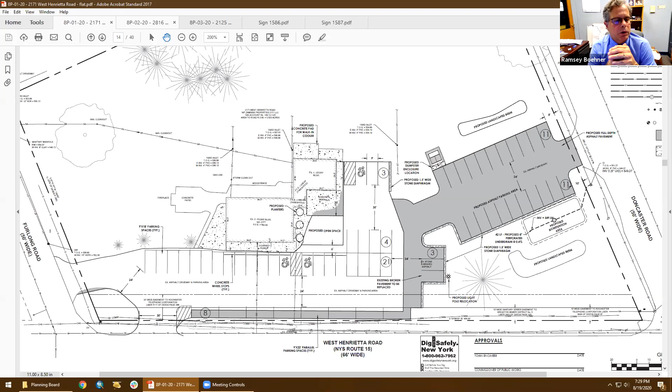The town is going to be looking for a sidewalk easement along the West Henrietta Road frontage. At this time, the commissioner doesn't want sidewalks constructed there, since safety improvements are hopefully going to be made along West Henrietta Road as part of a New York State DOT traffic study. He doesn't want sidewalks put in and then ripped out as part of that project, but would still want the necessary sidewalk easement along the frontage. It appears the entire neighborhood adjacent to it has no sidewalks. Yes, that's correct.

We're not proposing a whole lot for additional lighting. The main lighting on the site will come from the building itself, with wall packs to light up the entrances. John's already got a couple lights in the front parking lot along Route 15 that shine toward the building. One directly to the east of the building will probably stay. Another one is in the DOT right of way and needs to be moved, proposed off to the north near the parking jut out, a good spot to light that area. John's able to run electric from the pole in front of the building to those spots. That's all we're proposing for new lighting.

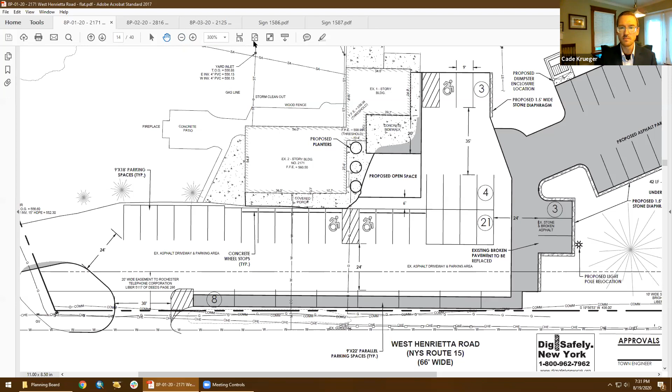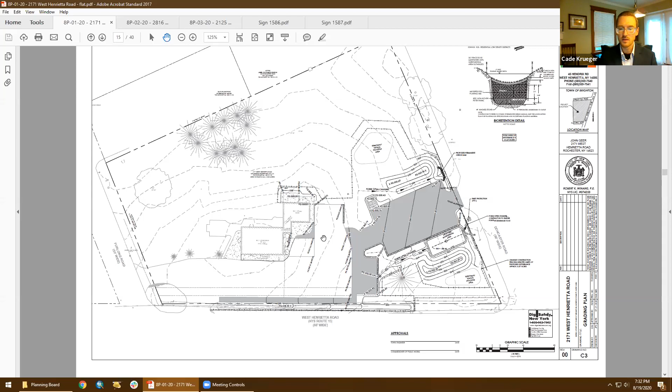Can you tell us a little bit about your stormwater management design? Drainage on the site generally flows in all directions away from the building. Most, if not all of it, eventually makes its way to Route 15 and then loops around to Doncaster. Some of it along 15 currently sits in low areas, and once it fills up, it keeps going around the corner to two drainage inlets in the grass along Doncaster. We're going to keep that drainage pattern the way it is as best we can. We do have a bioretention area with plantings proposed. After talking with town staff, we have a little work to do to get on the same page about how to handle the stormwater, but it's nothing we haven't done before. The increased runoff from the new impervious area, according to our analysis, is very small, but whatever the final number we agree upon, we're going to be treating it in that bio area that's going to be planted.

This is for Ramsey, if you can speak to stormwater - they're not obligated to either treat for water quality or provide any type of retention for the existing paved area, they're just accommodating the new pavement on the redevelopment parcel, Bill.

I'm just going through the town engineer's notes. They must meet our stormwater management code regarding increase in peak flow rates, velocity, and duration of stormwater concentration, and address how that's mitigated. Technical calculations demonstrating compliance with our code need to be provided. We also need percolation testing.

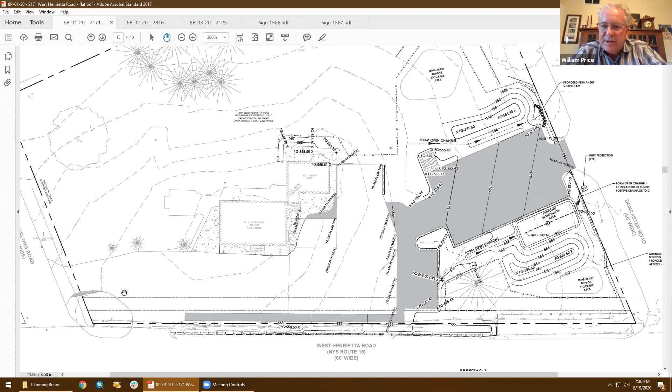I think what's proposed is fine. I'm just curious, it appeared there's a large dead tree toward the back of the parcel. There is one ash right along Doncaster that's deader than a doornail, and almost directly behind the building, north of the existing evergreens, are two fairly large poplars. They're multi-stem, and at least one stem on each is completely dead. They're probably 50 to 60 feet or more, and we're proposing to take those out—they're very messy and pose a danger in terms of breakage and dropping limbs.

I also noticed the area between the shoulder of the road and the pavement—not the area where the buckets and that curb cut is closed off—needs to just be neatened up. Same with the area closer to the southern curb cut. There seems to be a lot of volunteer growth that might be a sight distance issue if that curb cut stays open.

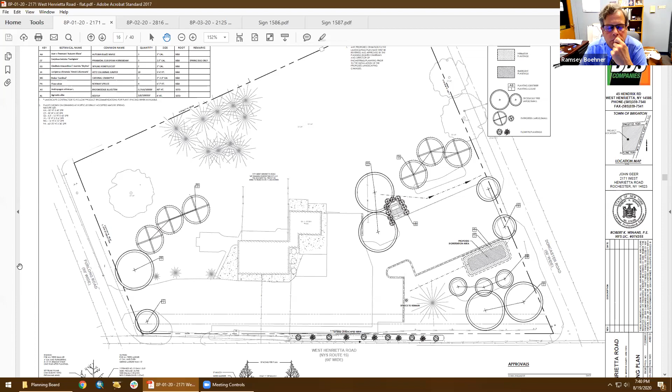Where is it located now—the dumpster? Do you see the landscape plan, Ramsey? It's on the additional parking to the north, on the western edge, with small evergreens around it. No, where is it currently located? Oh, it's pretty close to the building, I think—isn't that right, John? Currently we just have a small, like 10-yard dumpster for construction debris. Isn't there an existing place where the dumpster's been located with the enclosure?

It might be good to know where that was and why we're moving it. So according to some old pictures that I have, it was in that vicinity, and it's in real poor condition. It was always exposed, the surrounding fence around it was pretty weak, and it was always an eyesore.

The other thing to consider is if the town does allow the ice cream pickup there, with prevailing westerly winds. The other motivation was to move the dumpster away from any area where people might be eating, just because in the summertime you can't totally avoid odors. So the dumpster was moved away.

I got you, you're saying you moved it to the northern part. It wasn't there, but it used to be over by the building, over by where the ice cream window is going to go. And you're telling us you want to move it because you don't want it near the ice cream window. Correct.

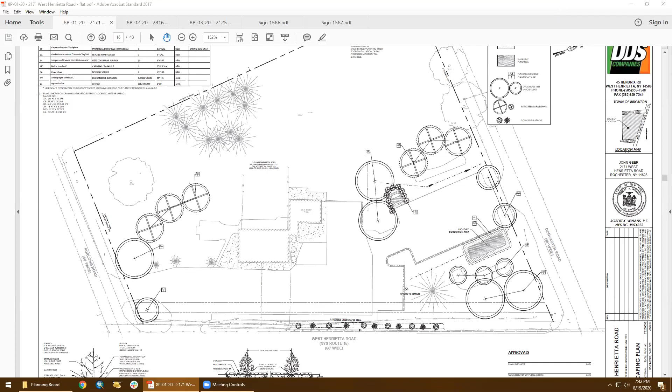Okay, let's ask if some board members have any questions. I do. I'm wondering why the separation of the northern parking addition from the existing. You could gain at least 3, maybe 4 spots if you didn't keep the drive between the two parking areas.

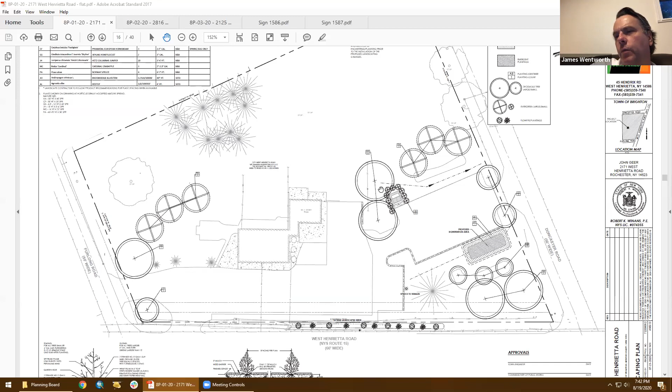Yeah James, I think the part you're talking about is like the little bottleneck there. Correct. Yeah, so I guess the main reason for that is we're trying to utilize that existing drive as best as possible.

I think you're right, I think we have some room to shift that to the south if we need to, especially to get it away from that property line on Doncaster a little more. We just need to make sure that we can make those turning movements coming around the corner there. But I think you're right, there's some room to play with.

The other thing to be considered is how that area is going to be graded to drain it properly. Right. Fair enough. Thank you, James.

Anyone else? Laura, John? Yeah, I have a question. So I realize they're applying for a variance not to put in fire protection sprinklers, but I just want to know, is the water service to the building adequate if sprinklers end up being required for the building?

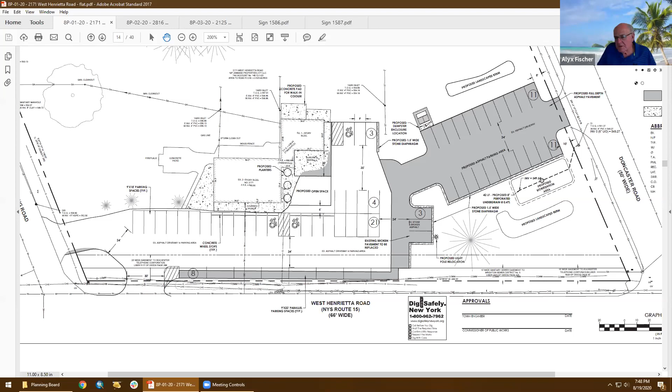There is a threshold that kicks in the state code. For the town code, if you put in 50%, make improvements to the building, 50% of the building's assessed value, the town code requires you to put in sprinklers. So those are the two thresholds. What the exact seating count is for the state, I don't know, Laura. I believe it to be 100. Thank you.

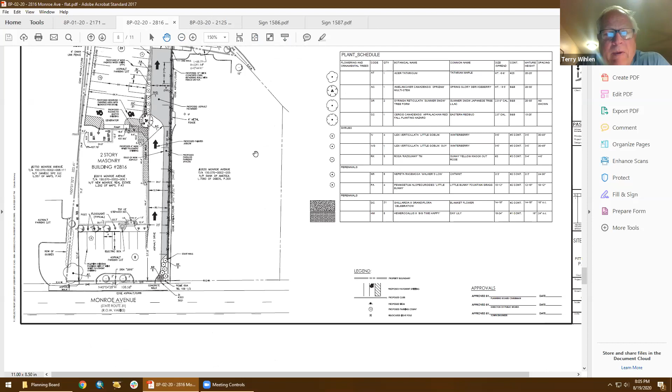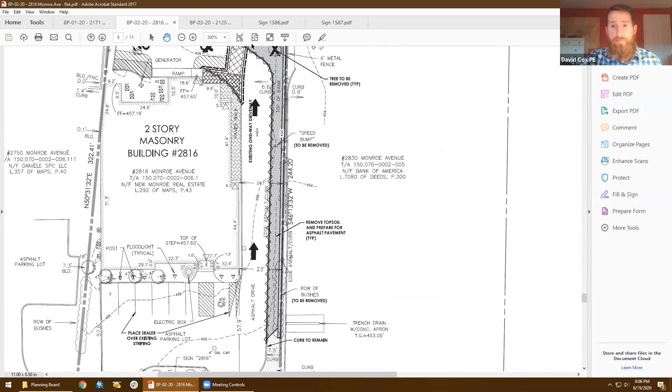Right now it's a little more than 12.5, closer to 14 or 15 currently. We are expanding it to be able to put the parking in there. It will be 12.5 after we finish all the improvements, with 8-foot wide parking spaces. Is that correct, Dave? Yes.

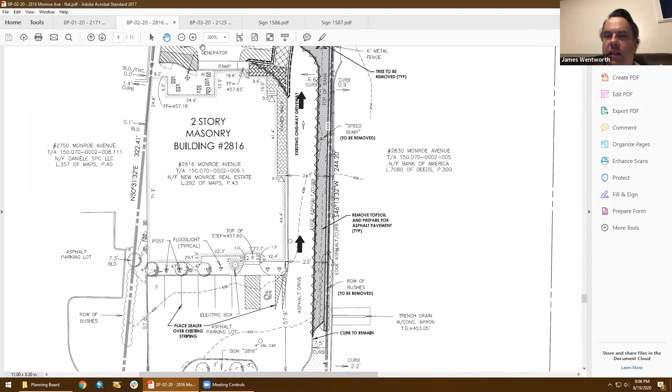Are we talking the drive on the east side? Yes, there will be parallel parking on the east side. Forgive me, I missed that. Gotcha, and that starts necessitating the need for the retaining wall.

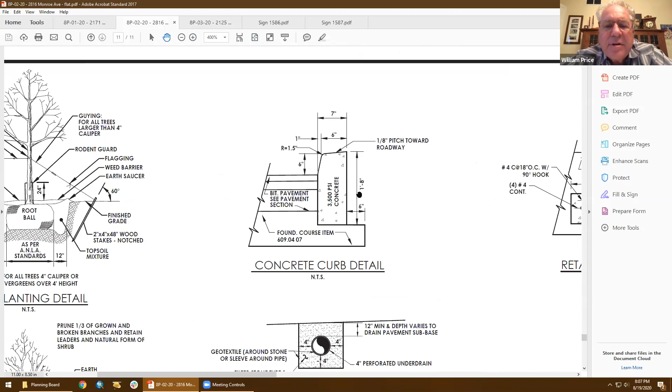Is there a section of the wall? On the detail sheet there is. That kind of top middle - you're cantilevering it back, little bit to the right. That's the regular curb. Okay, I see.

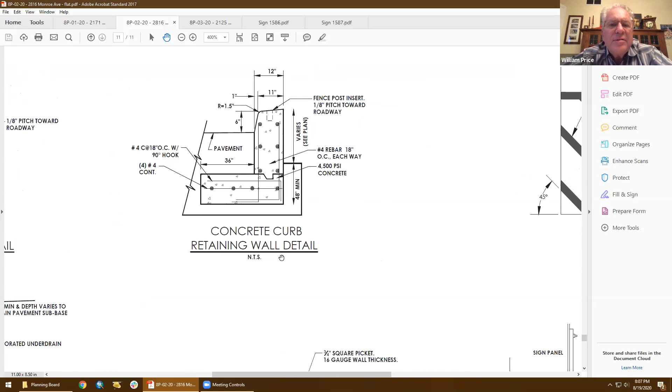And you're just putting a fence on - is that like a 42-inch barrier, or is it a railing? It's going to be more like a 42-inch fence. Okay, I see. Yeah, and that's it. Okay.

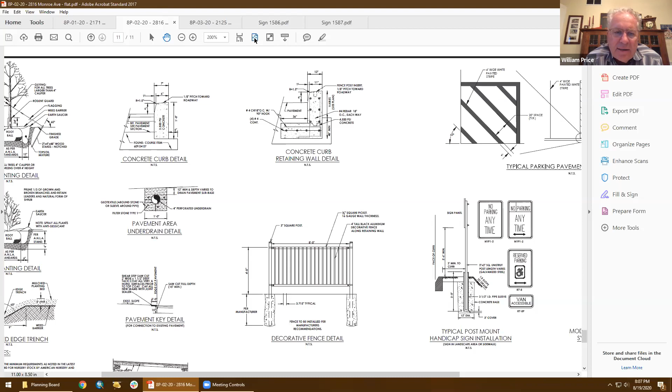One of the things I know, because we go there quite a bit, is the staff take animals out for a walk on the lawn area and under those 3 trees that will be lost. Where are you going to take the animals to walk now? First of all, I wish I was a doctor, but I'm not - I take care of all the facilities. My son is the doctor and hospital director for Pittsford Animal Hospital.

Todd's your son? Yes, he's our vet. Anyway, when I talked to Dave, the fence line that we have over on the west side, we would take and move that right over to the property line, and that would be a green area to walk them down in front of the cars. I noticed that fence line is the chain link part, and I think what's part of Mama San's property.

Is probably that wood shed that's out back, or maybe it's part of a fence. I couldn't tell, but if you kind of cleaned that area out - there's some dead trees and brush in there - and reset a new fence, you probably could get some lawn between the pavement and the property line. Yes, but that needs a little cleaning up. That fence is pretty old and bent up and everything else, we want to get rid of it.

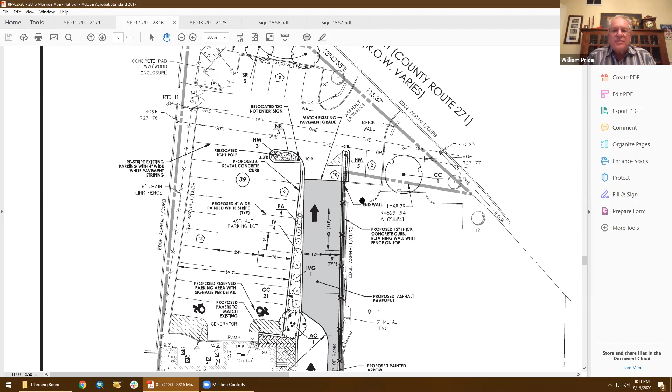Yeah, there's actually 6 there now. The two is - there's part of 6 that exists there.

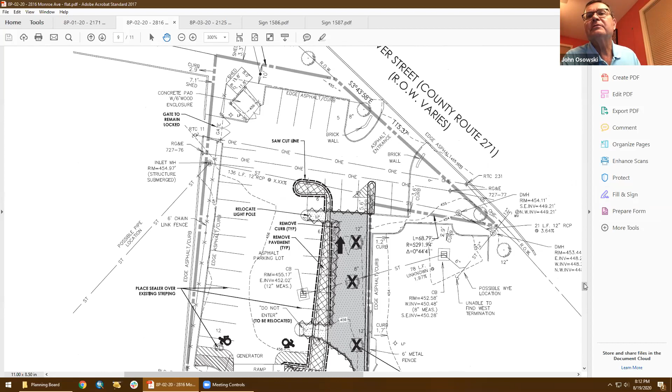Other questions from the board? Yeah, this is John, I have a question - how do you handle snow removal and snow storage on this site? At a lot of our places, we haul it off site. We have a contractor that'll come in with a dump truck if it's that amount, and load it up and take it off site.

Dave, have you checked to make sure you have all the compliant accessible parking spots by numbers? Yes.

Laura, Jason, any questions? No, I'm all set. Thank you.

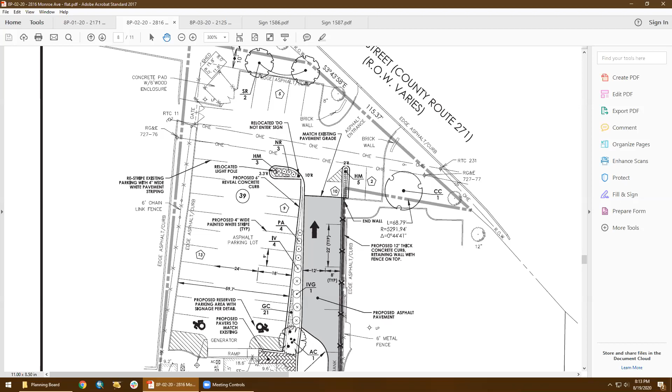Terry and David, thank you. Thank you very much, again thank you very much. We'll be discussing this a little bit later. Oh David, I'm sorry, remind me, you said September 2nd for the variances. Right, okay, all right, thank you.

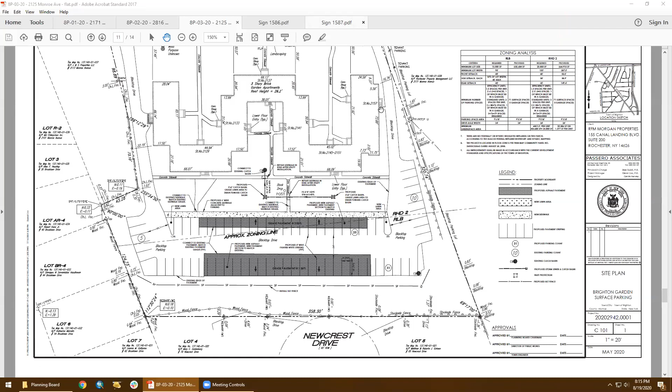Am I able to share my screen at all? There's some pictures I could show, don't know if that's possible. Jeff, can you do that? I'm not sure, we can try. Does it give you an option now, David? Yeah. All right, can everyone see that picture?

Yeah, so here's just people kind of leaving their stuff there. Here's another one. So it's just not what the garage should be used for. Morgan is there. Each unit has storage inside the building, so they would much rather have people store their things in the enclosed storage units inside the building and not just pile things up in the garage structure. So they would like to remove the garage structure that's in really rough shape and just put in surface parking. That's what they're going for there.

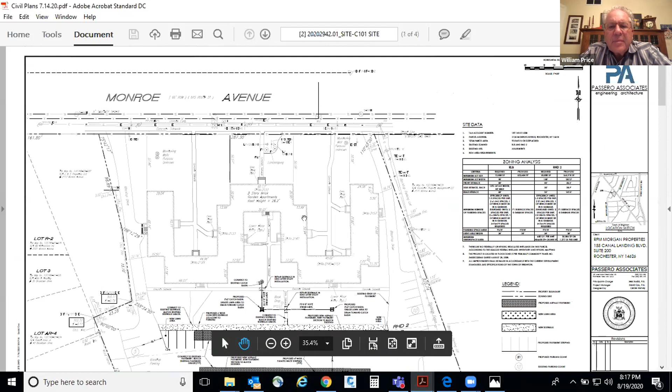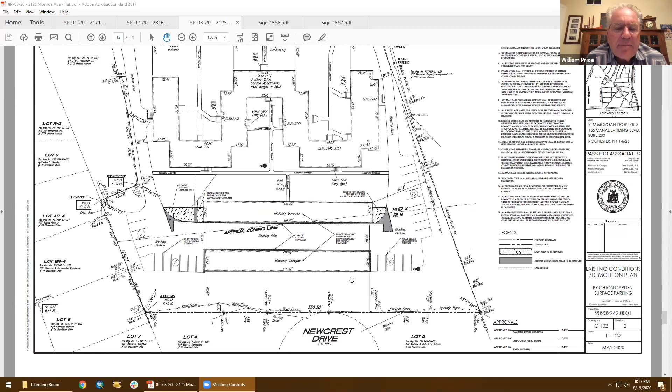Okay, could we go back to the site plan? Jeff, please. So the one that you were just showing us pictures of is along that south side. And north side, both of them. There were pictures from both sides, they're both the same structurally. Okay, and how much distance is there from the back of the garage to the property line? I'm afraid I can't read that. 42 feet, I believe, 41.9. Okay, all right.

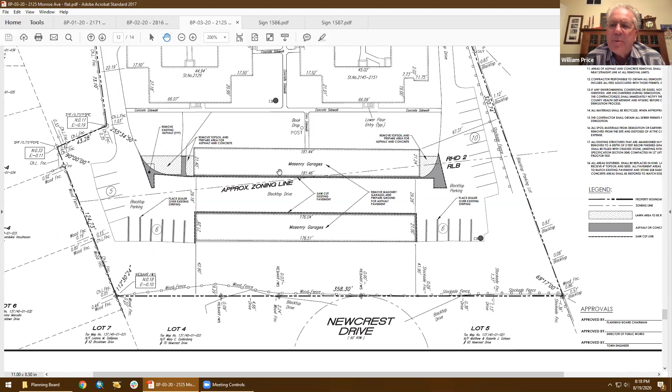And when you talk about replacing with asphalt, is the slab currently concrete and you're going to tear that up? Yeah, they would tear that up and just make it all asphalt. Okay, how about any new lighting, is there any new lighting proposed? So there wasn't going to be any new lighting proposed.

And what do you have in the way of drainage back there, do you have drainage structures? So on the south side, the current parking structure just has a sloped roof that dumps water off the back, and then it goes into the grass area where it infiltrates, so we would just maintain that existing drainage pattern. On the north side, we're putting in two new catch basins that the parking will drain to, that green space area drains to the catch basins, and we'll tie that into the existing storm sewer network.

I see, okay, oh I see where your two structures are. Okay, all right, so the concrete sidewalk and the asphalt will be flush? Right, correct. Okay, I see, okay.

Very good, all right. Does anyone, Ramsey, do you have questions? Yeah, Dave, how do you see the headlights from the cars that are parking there at night being screened, especially during the winter? I know there's some vegetation back there, but I'm a little worried about all of a sudden now we have a row of parking behind those houses on Newcrest. And how do you propose screening those headlights?

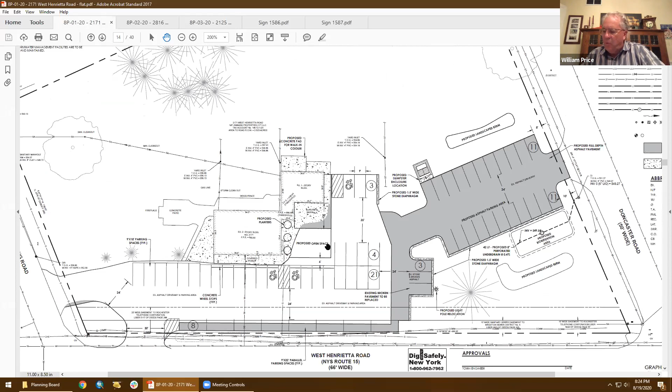Shall we circle right back and make some decisions, and then we'll look at the signs? Sounds like a game plan. Okay, application 8P0120. John, I have it as Greer, but is it Gear or Greer?

This is 2171 West Henrietta Road. So this needs variances, right? Yes, and we need to know what's going on with the occupancy loads. How many seats are they going to be allowed to have? I would think so, so we can know how many parking spots they really need. Yeah.

And two, are they going to have that ice cream window or not? Because that's starting to dictate the dumpster location. Mm-hmm, yeah. I don't know, I went out there and was a little surprised how much is done. The parking lot is not done, but the restriping and sealing is done, like he said.

I don't know. I would love to see some type of sidewalks internal to get people to the front door or to the ice cream. Everybody's going to be walking down the drive aisles, but there's no real precedent in the neighborhood. There isn't a sidewalk within a half mile.

Well, there is up on the U of R stuff, a little bit to the north, but yeah, I mean, this is a tough one, asking them to walk in the parking lot. I just don't know how busy the parking lot's going to be. Right.

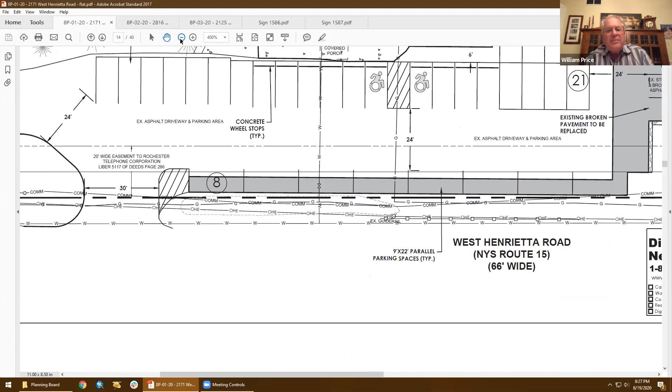And I would say, Ramsey, I would not want him to just gore stripe that curb cut to the width that DOT wanted. I'd make him pull the asphalt out. Is everyone okay with the parallel parking spots?

I'm not, but what else can you do about it? Do they really need them? Frankly, should we be asking them to bank some of these parking spots? How did those parking spots affect the sidewalk easement?

They'd be gone if the sidewalk was ever built. Well, you'd be trying to put some of it also into the right-of-way. Asking DOT, we could put the sidewalk in the right-of-way. We've gotta figure out what the zoning board's gonna allow them to do, because if they don't get the occupancy and those spots aren't gonna be there, the town would definitely prefer to have the sidewalk along the property frontage.

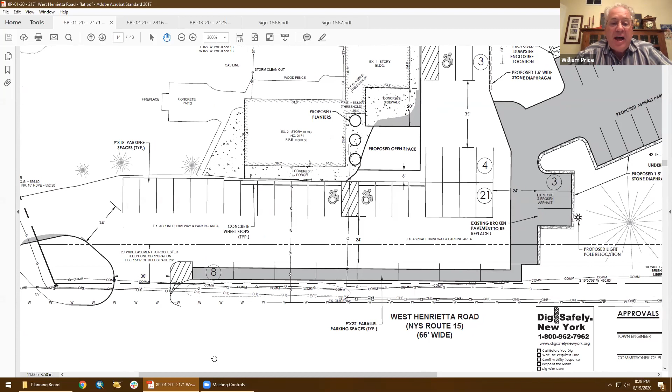I would either want to see the sidewalk or that turned into grass and the pavement saw cut and removed. There's pipe rail, guardrail along there, which, along with the invasive plants, makes it all rather ugly. Because I was wondering if we wanted to try to get those parallel parking spots somewhere else on the site.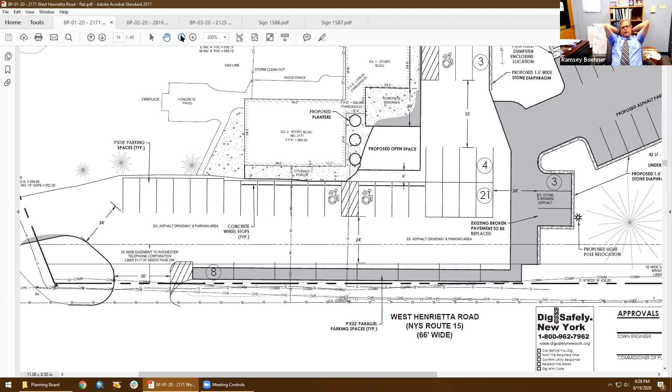And do we want to close off Furlong or the West Henrietta Road access point? To me, it doesn't make any sense to keep the West Henrietta access point with the Furlong right there. And you also have a light at Doncaster so people can make lefts out of there. That's really dangerous having Furlong and that curb cut that close together. No, I don't like that.

One of them, I like to go. I sat there for 10 minutes trying to get out of there. You should have gone up to Doncaster. I used to, but I just couldn't get through the signal. The site's all blocked off because he just had it sealed. Gotcha.

I'd be all for a condition of removing that curb cut. Yeah, I agree. And if the occupancy doesn't justify the 8 parking spaces, I'd rather have those 8 parallel parking spaces removed.

If he desperately needs the parking and we get him to remove the parallel spots, he could land bank something to the northwest, or the west of the new northern spots. You've got a ton of open space there. Sure.

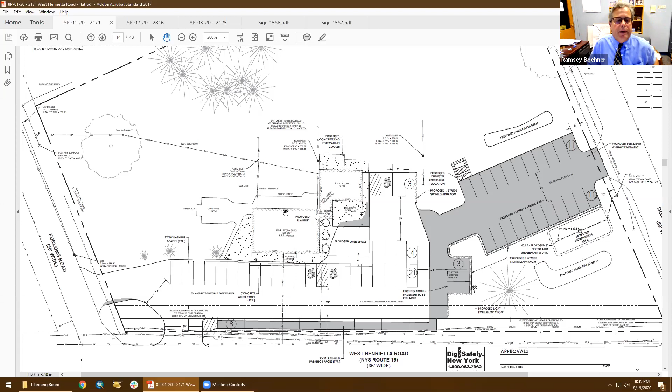That's all good, because that hasn't been the history with that property in the neighborhood. Those are the positive things. I think in many ways this may be a benefit to the community. I like walking up to places in my neighborhood, and we have that going on also off Penfield Road at the Treetop Cafe. Those folks seem to like that. I'd much rather see this operating than the way it's been for the last 20 years, a roller coaster. So those are the pros and cons.

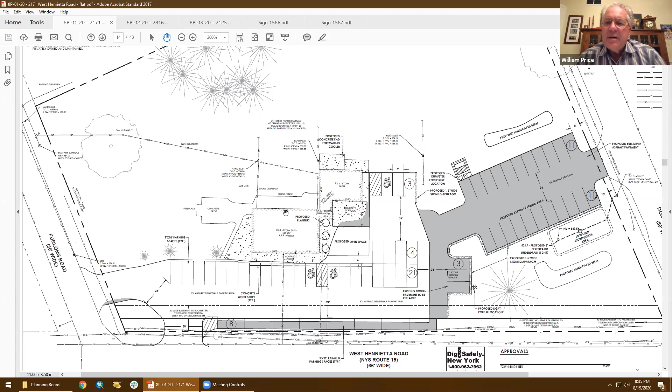I think if we can just get some minor improvements on this, let's not shoot much higher, just get some minor changes. I'm just noticing, Laura, did you see this detail they've got along the edge of the pavement? Are they putting stone around the edges of it? Yes. Is that on the parallel parking, or just around the edge of the pavement in general?

I think it's maybe there to try to break up the velocity of the stormwater. It seems to be near the stormwater facilities, on the downhill side of all the parking. I've never seen that work for very long, it just gets filled up with weeds and gets weedy. I get it, but it's so flat out there, I don't know that that's necessary.

That area is going to be reworked too. I know that, so fair amount of comments. I'd rather have them put a perimeter drain around to catch the runoff coming out of the sub-base than have them do this. But I'm open to the engineers' ideas on this. I just don't think it's going to work. Bill, I don't mean to be rude to the engineers on the board, but sometimes when it comes to stormwater, I've seen some pretty ugly designs.

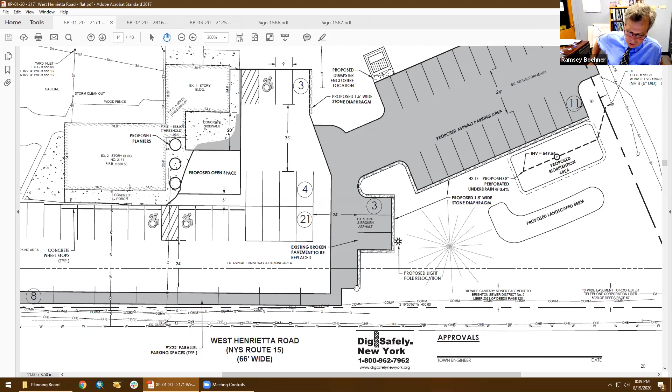I have a modification to propose to condition number 27. It should read: the vehicles using the driveway access from Furlong Road might conflict with vehicles using the West Henrietta Road driveway. Both West Henrietta Road driveway access points shall be removed. Period. Good, that's all I had to change.

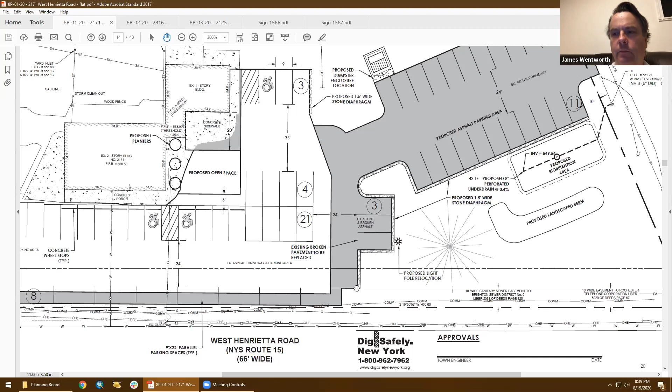Okay, moved and seconded. All in favor, actually Ramsey, we better do the roll on this. Let me do the roll. Wentworth, aye. Price, aye. Civiletti, aye. Babcock, Steiner, aye. Wasowski, aye. Matter's tabled, thank you.

Okay, application 8P-02-20, Astro Associates for the New Monroe Real Estate LLC. This is the expansion from 36 to 47 parking spaces at Pittsford Animal Hospital, 2816 Monroe Avenue. So Bill, you're concerned about having two fences back to back? I just think one's actually going to look like it's on top of the other one.

He can physically do what he's showing on that detail. It's too bad that the bank doesn't even have staff there anymore. There's 10 or 12 parking spaces back there that are completely unused, and we're going to jam 10 pounds of asphalt into a 5-pound bag on this site.

We can't get anybody to cooperate or have shared access. You know what happened, I'll be honest with you, the bank put their fence on the veterinarian property at one time. They asked for permission to keep it there, and the vets told them to get it off their property. So my hunch is if they went back to the bank, it probably wouldn't be very cooperative. I see, there's a little history there, always these backstories.

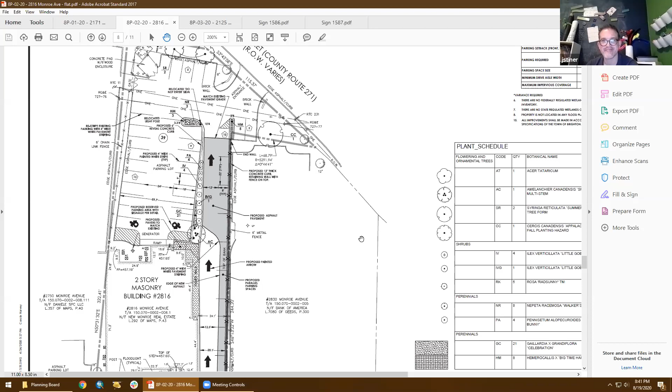Well, this is unfortunate. It's an asset to the community. I don't know what anybody else feels, but it seems, in your experience, they need parking, right? Oh, yeah.

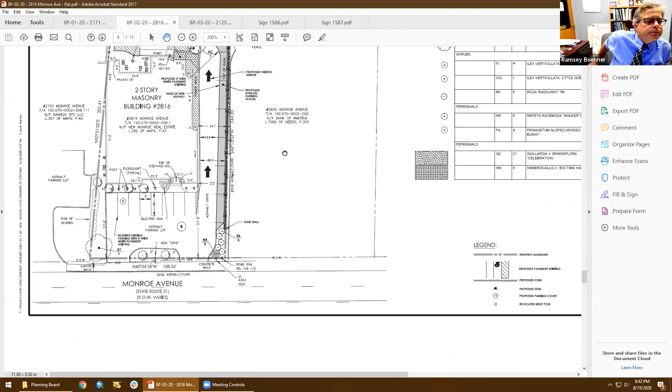Honestly, I'm not sure I wouldn't ask them to close one of those curb cuts out onto Monroe. The one to the west. It doesn't matter whether that curb cut's there or not.

That's a very tough parking spot to get in at the end. They actually have enough room there to create a 3 or 4 foot backup space to help the person backing up, and then close off the rest of that curb cut - the west one. And then where it says 57.6 would be the backup area expansion.

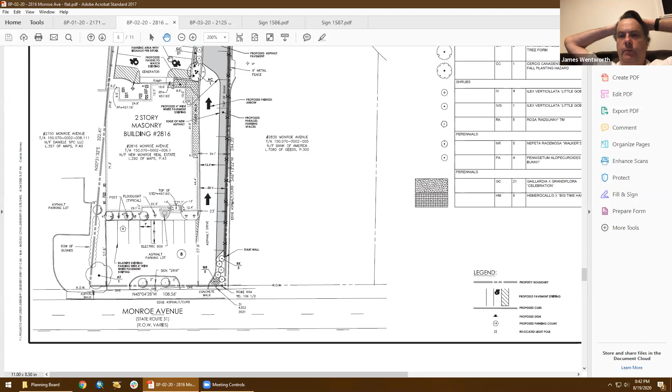I don't know if others agree with me or not. I do. Is it consideration should be given? Can we make it stronger? Do whatever you want, you're the board, man. Do whatever you like. Recommend is not strong enough either.

My concern is if you cut that second curb cut off, when you have such a tight perpendicular parking situation, it's not always easy to back out in the same direction you came from. I don't know that it would be an improvement to cut that second curb cut off. What if you made it one way in and one way out? Because I've ended up where there's 2 cars trying to pull out of both curb cuts at the same time.

I don't think there's really any good answer. There's not. But I don't know that we can make any improvements by tampering with what's there. Cross access would be helpful. Yeah, it would be very helpful.

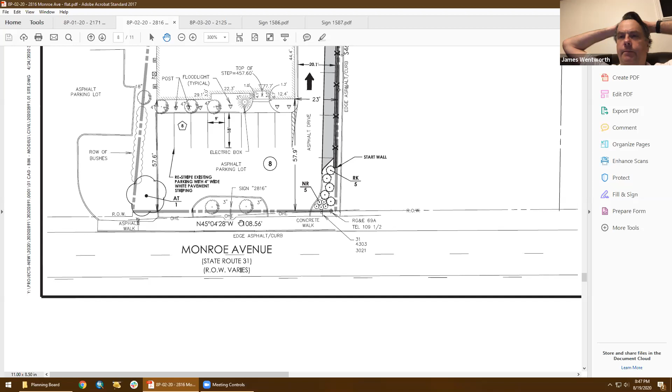One thing I wanted to bring up is that I am concerned about fire access going down that driveway. And not for nothing, that's a variance from the zoning board, and maybe that's more on their side, but I'm not so sure how the fire marshal is going to sit with that. Drive is one thing, but setup - I'm assuming the fire truck would have to set up on that aisle.

I don't know, I have to talk with the fire marshal. I don't know if they would set up that close to the building. But they may want it as access out - they may want to drive through there to get set up, or to get to a hydrant. I'm not sure.

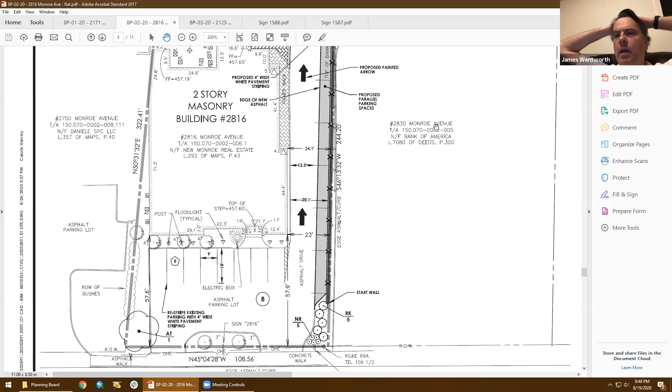That's going to be more for the zoning board, because they're the ones that have to grant the variance - 12 feet. So how many spots do they have existing? 36. 36, and they're increasing it by 11. The majority of those 11 are along this fence line as parallel parking.

I'm going to tell you, I know what he said about the first one coming in and parking and then the next one. But if one leaves and someone else comes in, they're going to be hard pressed to do a good job of parallel parking there.

It just really feels like I don't know how you keep customers from trying to park there. I don't think you do. You've got 8-foot wide spaces on a 12-foot wide access lane. I don't have a good answer for that.

This is a tough one. I really don't think there is a good answer. I see their dilemma with trying to add some spots. I don't think we can make any improvements with the access on Monroe Avenue, but I'm not opposed to them trying to add spots in the rear of the building.

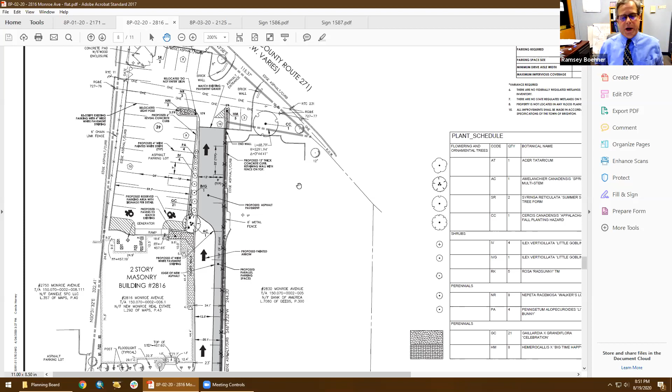But as you're saying, you being one of their customers, and saying that they need parking and they're there - I don't know what has changed. It is documented that they have a shortage of parking. Yeah, this is just so appropriate for a shared arrangement of some kind.

Maybe down the road when the dust settles, we could revisit it. Well, let's table it. Yeah, it's tabled.

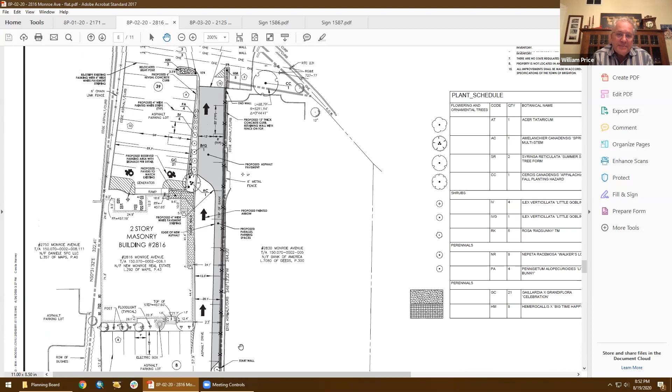I have an additional condition, I don't know if you guys care. The gate shall not be closed, and the parking spaces should not block the gate until the trail improvements have been completed. I don't know if you care about that - that's the only note I had.

No, we care because it looks like it's active now. It is active - the trail is active through there. So yeah, that's a good one. That's all I had.

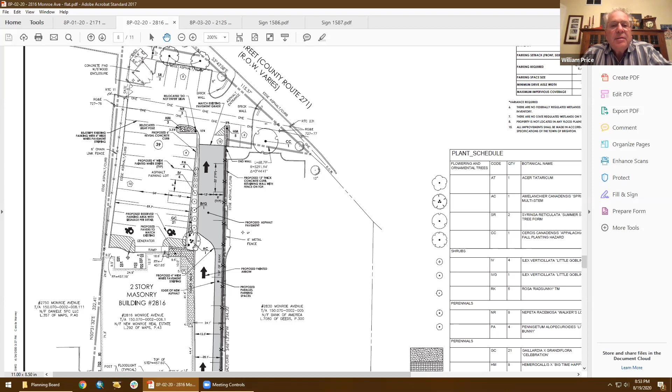Do we have a motion? Did we already do it or no? No, no. Yeah, I'm looking for the cheat sheet. Go for it, I'll get the number.

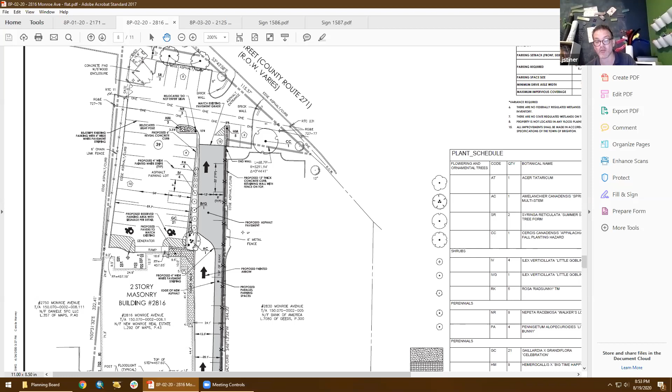I move that application 8P02-20 be tabled based on the testimony given and plans submitted. Additional information is requested in order to make a determination of significance and to have a complete application. There's going to be a total of 17 - the 17 items outlined in the planning board report are required to be submitted no later than 2 weeks prior to the next planning board meeting.

I'll second. Oh, who was the second? I'm sorry, James got it. James got it, you got there first? Yeah. Let me just ask the steno, are you okay with the 17th condition? Okay.

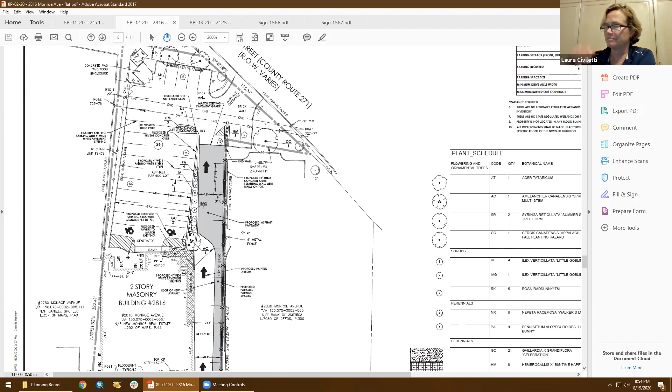Wentworth? Aye. Price? Aye. Civiletti? Aye. Babcock Steiner? Aye. Osowski? Aye. Okay.

Application 8P-03-20, Passer Associates on behalf of RFM Morgan Properties, owner, for site plan modification: demolish 2 20-stall carports and replace with surface parking at 2125 Monroe Avenue, the Brighton Garden Apartments.

Do we have a motion for approval on this one? Approval or tabling, because they need the variances. Oh, they do need variances, it's a pretty big variance. The variance is for covered parking - they are supposed to provide covered parking. Your two spaces per unit are required.

One of the units have to be covered. Is that consistent with just this zoning district or this property? No, the zoning district. All right, sorry, I forgot that.

We have a fix-your-fence condition. No, I don't have that. Looks like they already have a stockade fence there, it just sounds like it needs to be fixed. I'm hoping he'll send the message back to them and they will fix it. I could say the existing fence shall be properly maintained and fixed where needed. That's it, that sounds good.

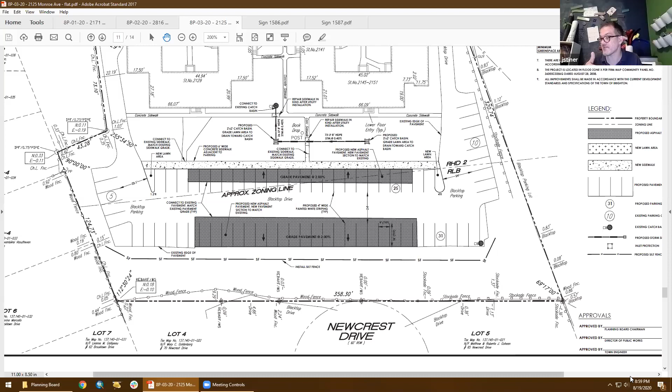Hey Jeff, you want to do some signs? Seconded on that last one was Price. This is the first one.

Okay. We could do side by side. What is that group? What do they do? I don't know. Strategy, growth, something, insight. Catapult. And off-site accounting and management.

Huh, who knew. Okay, it was approved as submitted, approved as presented. So you may want to approve it as recommended. I'll move to approve as recommended. Second. All in favor? Aye, aye, aye.

The next one, I would recommend that it be denied because - who seconded? Babcock Steiner. The next application was denied by the zoning board of appeals, so we should also deny it.

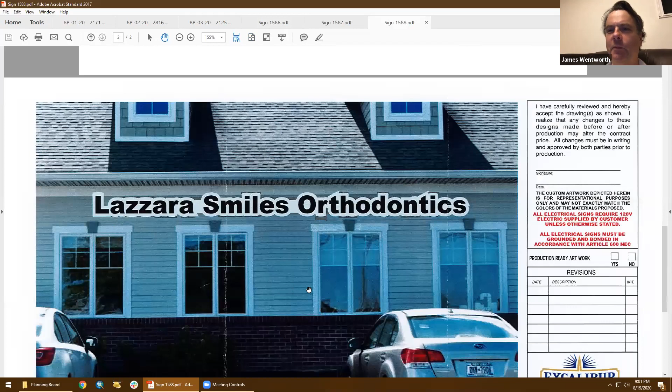It was denied because it's a freestanding sign and it's not permitted. Oh, okay, so we technically have an application that should be denied. Yes. Okay, can I have a motion and a second? I move to deny. Second. Wentworth, aye. Price, aye. Civiletti, Babcock, Steiner, aye. Osowski, aye. Application is denied.